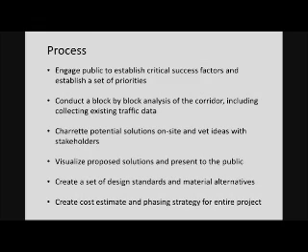We use a keypad polling process to really enable as many people as possible to provide input. We find it to be really effective, and it gives us evidence that we can then use to support our design decisions. I think in general, most everyone thought that if we could improve the pedestrian and bike component of the street, it would make for a better street. Improving pedestrian safety and circulation was our number one concern, but the community also wanted it to be beautiful in the end and to really promote Salisbury in a great way.

So I'm going to walk you through several sections of the corridor that illustrate some of the design proposals in the plan, and I think it's easier to see this in a before-after format. I'll reiterate that we really started with this image and looked for different elements we could use, and the goal was to create a cost-effective, implementable design, while maybe totally changing the character of the street. I'll also add that a key partner in all of this is NCDOT.

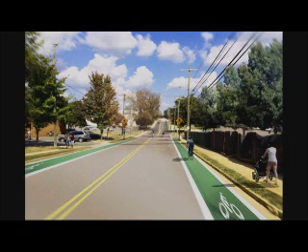And so initially we kind of thought you could narrow the street, give more space to the pedestrian, but we actually heard from Rowan Helping Ministries that a bike lane would be great because a lot of their patrons come via bike, and providing a safe route and a space for them in the street would be helpful.

One advantage is the width here. It does allow us to do that without necessarily adjusting the curbs.

Just curious, with the bike lane, would it actually be painted as you're painting it there? Will it actually be painted? Well, they could be. In our plan, we do have them painted, but providing the space would be excellent.

I think, if I can go back to this image, for instance, the bike lane could be painted a great color, and that could provide something really unique and bring a lot of presence to the bike, or it could just be the outside edges painted. The crosswalks could be of real brick, they could be of stamped material, you could do a pattern with paint inside of them, or they could just be standard crosswalks.

And the same thing happens with the sidewalk. So we're kind of showing an aesthetic treatment here that we think would be pretty amazing, but depending upon where priorities are and monies that are available, a lot of this can be accomplished simply by painting the edges and making all these safety features more clear.

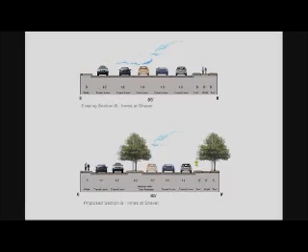This is an area that would be excellent for a stoplight. Unfortunately, it does not work with the current setup there, as the DOT would not allow an additional traffic signal installed.

So fatalities don't matter to NCDOT is what you're saying?

You have to have a certain amount, I suppose. We have to have a quota of fatalities. Okay, thank you for clarifying that.

There's also a lot of other things going on here. There's space within here, I'll clarify. This is East Innes. There's an ability to create a median on East Innes without necessarily limiting a lot of the access to the adjacent businesses.

We wanted to create a median to shrink the scale of the street and create a really nice aesthetic character that would take people from I-85 into downtown. Why I came to Salisbury for the first time was to see the downtown. Bringing some of that character down to the highway could be really fantastic. So how do we do that without necessarily blocking all the left-hand turns into businesses?

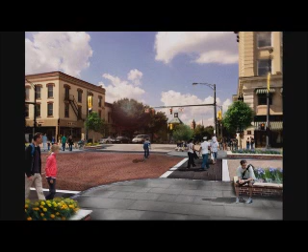So we took the spaces that are usually at the ends of the on-street parking and created bump outs. This reduces the crossing at the square from 60 feet to 44 feet, which when you're trying to get across the street while the pedestrian signal is on, that's a lot less - it's 16 feet more narrow. This would also provide areas where we could provide planters, trees, plantings that could lift the image of the space. And using some special paving techniques, we could make this a much more attractive, safer, pedestrian-friendly intersection.

One huge issue that we studied - could we go back? Yeah, to the prior slide. Before I forget to mention it, the part where the rubber hits the road - I've seen a lot of street designs that look great, but then the first 18-wheeler that comes through and screws up the curb, or knocks over the planter, or intersects with a tree or whatever else, it's not the use of that street.

Practicality and what's on the paper are different. Can we save that as a parking lot item to come back to? I love the way this looks, but I can also envision the planters being run over by 18-wheelers trying to turn right at the square. Sure, don't want to get you off your topic, but let's come back to it. Thank you - I think there's a solution for that. Okay, we have an app for that.

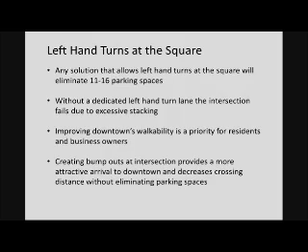So we came up with a pretty extensive document. I just wanted to walk you through some of the pages that we looked at. We did document and catalog all of our public meeting comments and keypad polling.

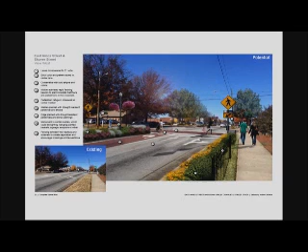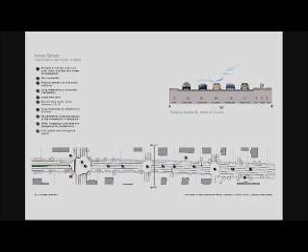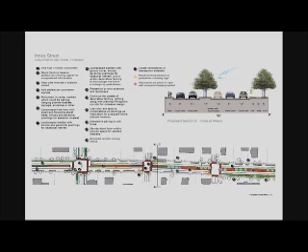Each one of these visuals that we talk about, we outlined the different elements that we're implementing in each of these scenes. Then we documented block by block some of the issues that we saw as a design group, and showed some strategies that we think could be implemented from a plan view standpoint, so you can see what is changing per block.

In addition, we had our traffic engineers look at Shaver and Clay and create a plan that could be easily implemented in the very short term.

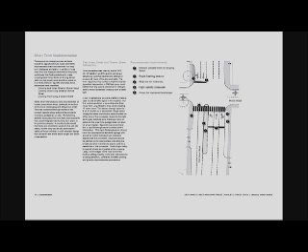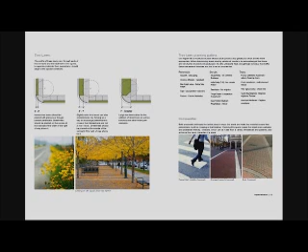Then we also looked at the material choices and created some basic standards of how to handle different situations as you approach the intersections. We took all of that and quantified an opinion of probable costs, so I can tell you the quantities are right. Obviously, with the market and the way that you find it, this is a good ballpark figure for costs.

I'll mention a couple of basic facts: this is a 24 block study, and these costs do account for all 24 blocks. Also, what we've found is we've accomplished this without really moving curb lines and changing the stormwater system. From our experience, if you start doing that, it's about $500,000 a block. So those are some of the things that we tried to focus on when we created this plan.

And that's it. Can we go back to South Long a minute? South Long Street. Almost there. That one. And your plan, okay.

All right. Just want to make sure that, did the church speak to, did Calvary Baptist put their input into it? First I'm sorry, Calvary, first, okay.